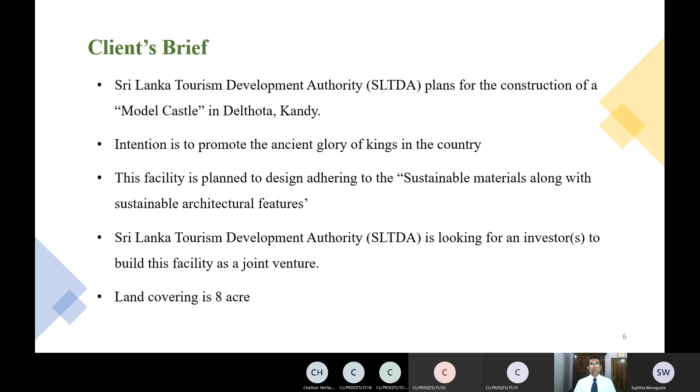Okay, when we move to the next slide, the SLTDA has given a couple of locations for us, and we selected this location from their list. Our main concern is the natural pond, because we're going to use it to develop the moat around the castle, and there's an existing building there too.

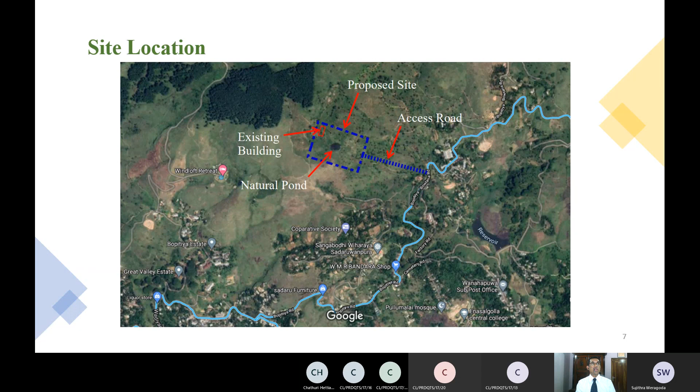Then in the next slide, we can see the geology and weather. The proposed location is about 32 kilometers away from Kandy city, and driving from Kandy takes about 45 minutes to 1 hour. The proposed area is situated in the wet zone of the country, and therefore it receives lots of rainfall throughout the year, and the 2 monsoons also bring rain to this area.

The proposed area is in the middle of the hill country, at an altitude of 816 meters above sea level. Everyone knows when the altitude goes up, the temperature comes down. So the average temperature is around 25 degrees Celsius, and because of that, the weather is more pleasant, because this area is very close to Nuwara Eliya. Everyone knows the Nuwara Eliya climate is very good.

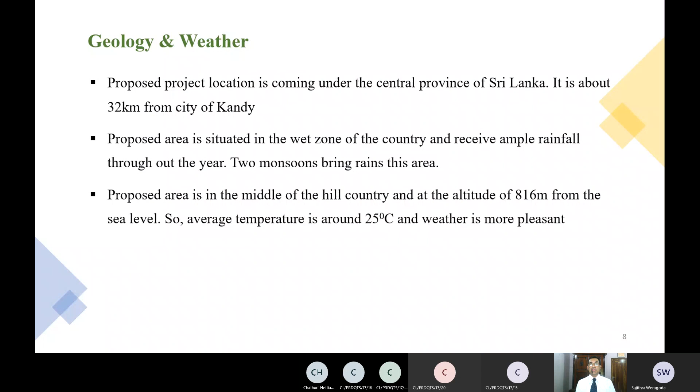So on the next slide, this is our environment: access and surroundings. The proposed land is in the middle of the mountains, so this area is a very peaceful and calm environment, because there are not many houses around there. We have an access road, about a B grade access road.

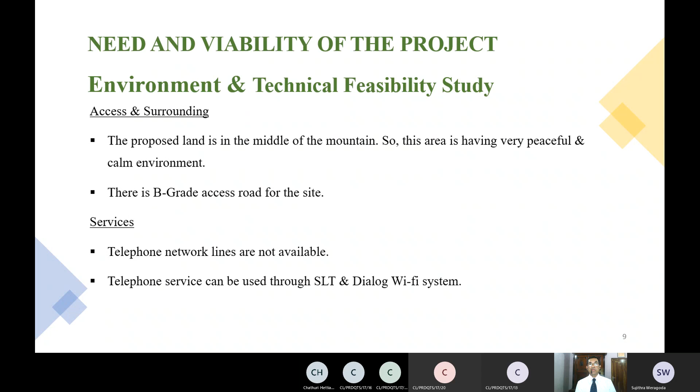Considering services, there is no telephone network, water supply, or sewerage network, because it's not very urbanized, and we think with our development the government will arrange these in the future. At the moment we have a Wi-Fi system for telephone facilities, and we could see two providers, SLT and Dialog.

On the next slide, we can see the water supply. The option is a tube well, because around this area we could find some tube wells. For the sewerage system, we proposed a sewage treatment plant and a grey water treatment plant. The grey water treatment plant will use wastewater from the washing machines and the shower area. This treated water we're going to reuse for toilet flushing.

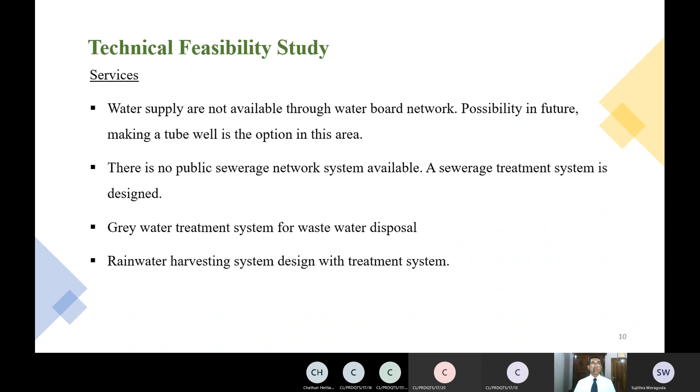And the other thing is, because of the heavy rainfall, we introduced a rainwater harvesting system, with a treatment system like a reverse osmosis treatment system, because that one gives water up to drinking water level. So when you go to the next slide, this is the financial feasibility study. Our QS will go into more detail on this one.

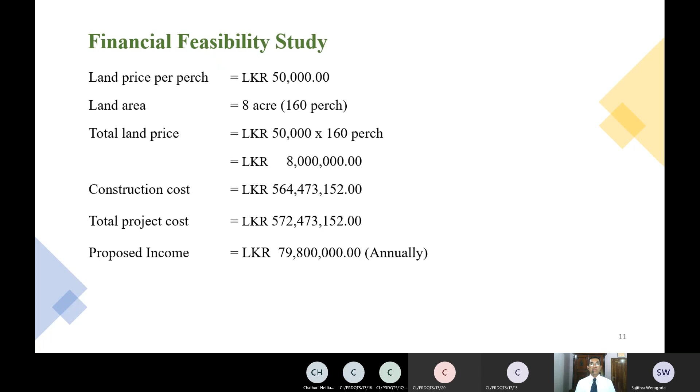When you go to the next slide, we did the SWOT analysis for this project to find out the strengths and weaknesses as well as opportunities and threats. When it comes to the strengths, CKG Consultant is a leading company in Sri Lanka for project management and building consulting, and we have good experience in project management of hotels, apartments, leisure parks, office buildings and house projects. Our professionals also have very good international experience because they have worked in Dubai and Middle East countries. So they have 6 years experience.

When you think about the weaknesses, this project is not an ordinary building. Actually, this is a unique structure, so most of the members of the team do not have such experience. The design is a combination of ancient architecture and modern technologies. There's no such development in Sri Lanka to follow for our methods and systems.

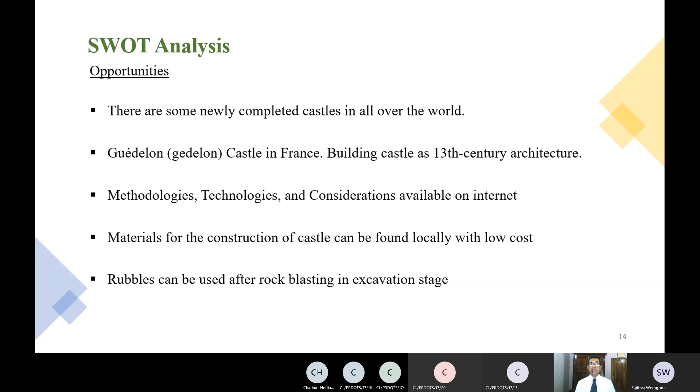When we see the opportunities, there are some newly completed castles all over the world. Recently we found Guédelon castle in France, and their methods, technologies, and considerations are on the internet, so we could go through that one. And when you consider the site area, we found the materials for the construction of the castle can be found locally at low cost, like bricks, sands, and also rubble we can get after rock blasting in our excavation stages. So that is what we analyzed.

We consider the threats. Actually, the Kandy district is identified as a hazard area, but fortunately, as per the landslide hazard zoning map of the Kandy district, our site is in the area where landslides are not likely to occur. They have marked it like this. So this is more relief for us and even the client also.

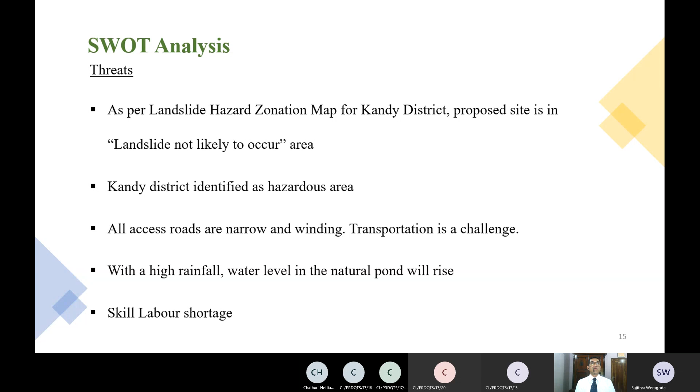All the access roads are narrow and winding, so transportation is a big challenge. And with the high rainfall, the water level of the natural pond will rise, so we have to consider that a lot also. And most commonly, skilled labor shortage; we have that same problem. So when you go to the next slide, these are the institutes we have to go to for the approvals, and we have to follow their regulations.

Then we'll go to the next slide. As I showed you earlier, we have a two-storey building located near the site. We are going to convert that building into staff accommodation in the operation stage. Before that, in the construction stage, we are going to use it as a site office and construction staff accommodation. So I think I have done my part. Hereafter, our planning engineer is continuing this presentation for you. Thank you very much.

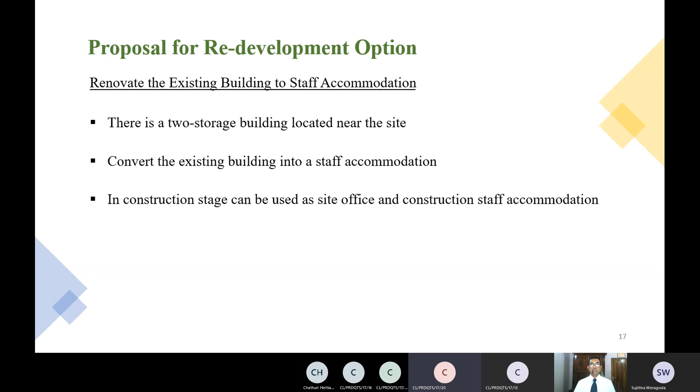Thank you, Mr. Maxwell. Carry on. Good. Thank you, Maxwell. Good morning, all of you.

I am Gayan Pereira, planning engineer of the proposed castle project for CKG Consultancies. Planning and making arrangements is a special part of the construction industry which helps to suppress unnecessary delays, issues, and unnecessary expenses. We have to get the approvals, and some clearances have to be obtained from the government before the inception of the project, as well as identifying the legal aspects on behalf of the client. By legislation in this respect, the government expects to reduce the unnecessary influence against the environment and

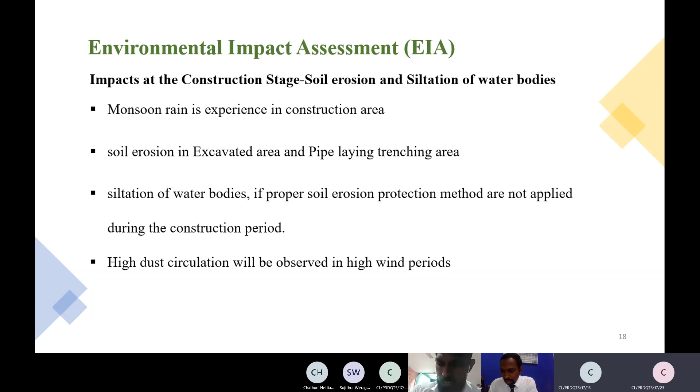Maxwell, can you see my desktop? Yeah, video is okay. No, the slide is not moving. Yeah, now it's okay, carry on.

Okay, good evening everyone. This is Ashan Chaturanga from CKG Consultant, acting design engineer. This is our site layout.

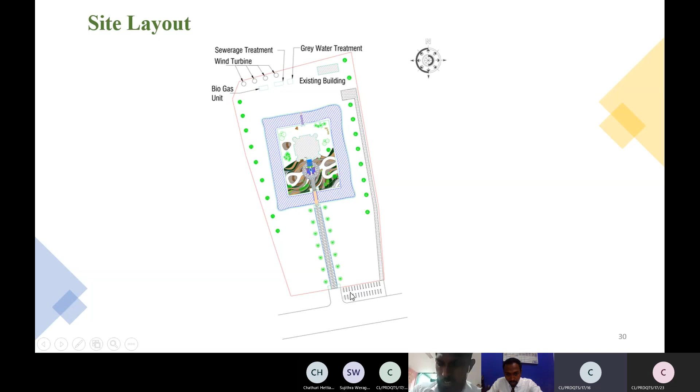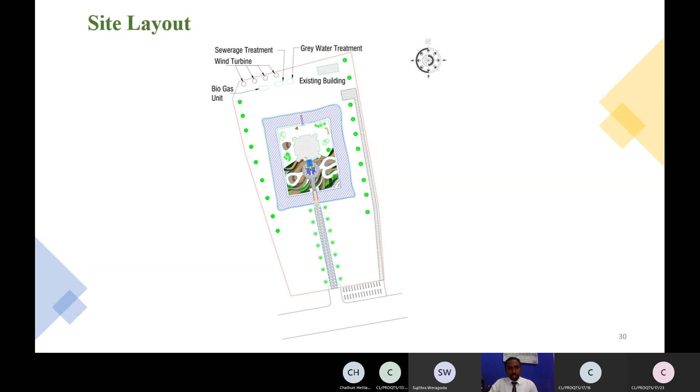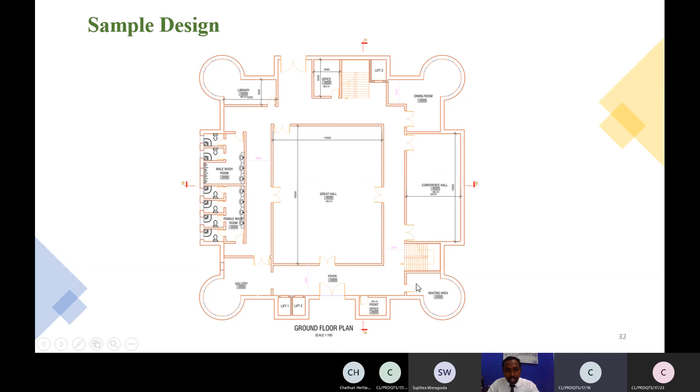This arrangement, the middle part is the great hall, and the other side is the conference hall, and this is the washroom area, and library, dining area, office, and front office, waiting area, gallery in there.

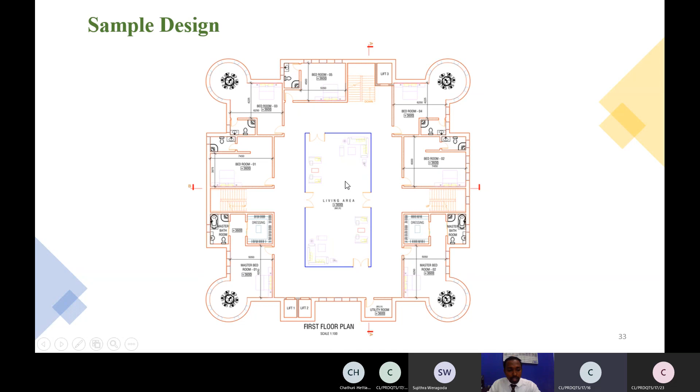The first floor plan we mainly reserved for guests. These two main areas we reserved for master bedroom, and other areas are normal bedrooms, and the middle part we mainly use for living area.

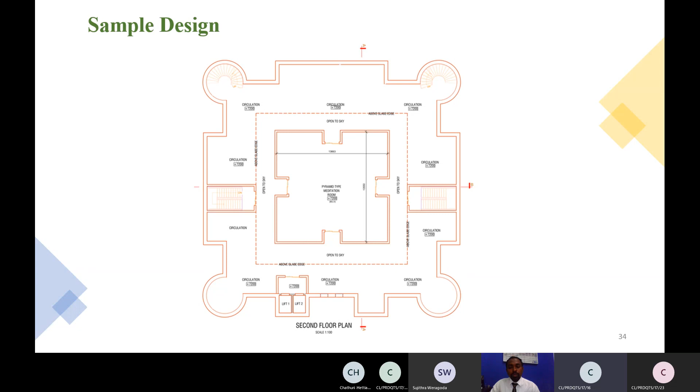Next, the second floor plan is actually reserved for, in the middle part, meditation purposes. This will be constructed with a pyramid structure, and roof terrace. The roof terrace, actually the middle part is void.

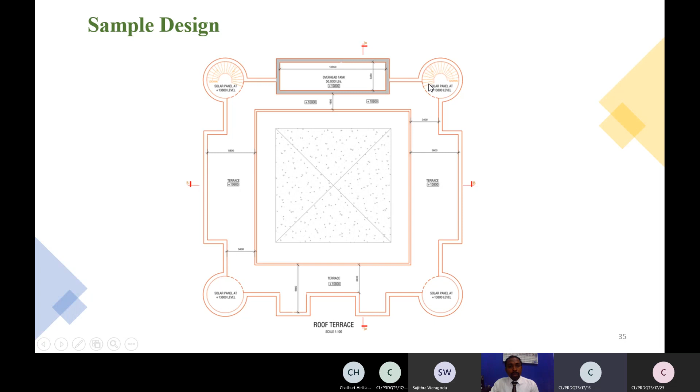Around the part we have a terrace floor, and the terrace is used for guests for walking and seeing the surrounding environment. This is an overhead tank, 50,000 liters capacity. So on these 4 towers, above level, we are planning to place solar panels.

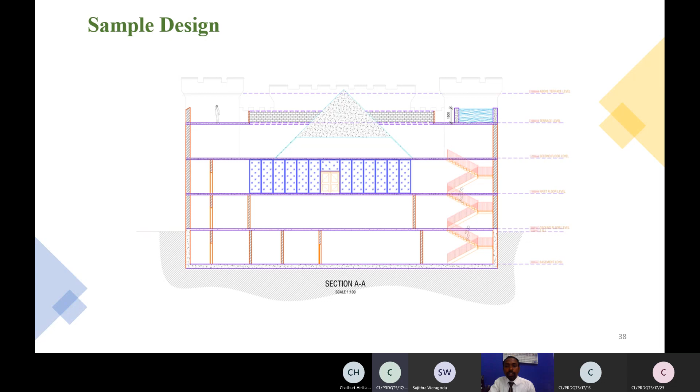I mainly highlight the bearing capacity for the raft. It's 150 kilonewtons per square meter, and settlement is 50 millimeters.

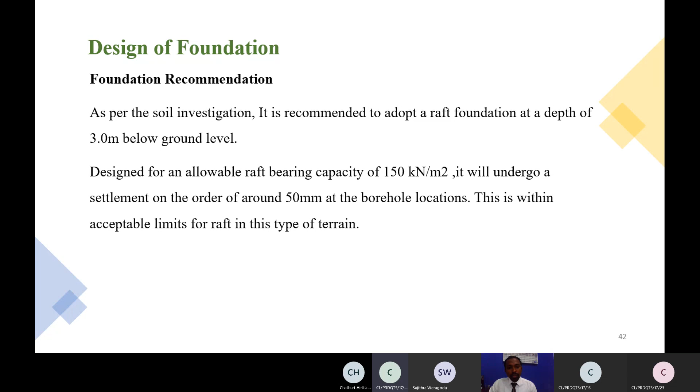I have done some structural modeling and analysis. This is the base pressure in there. So we achieved our bearing capacity, and this is my structural model.

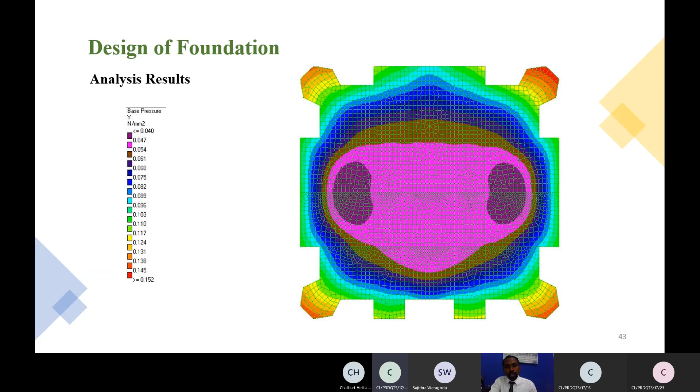Thank you for giving me the chance, and take the next chance for our quantity survey. Thank you. Okay.

Yeah, thanks Ashan. Good morning.

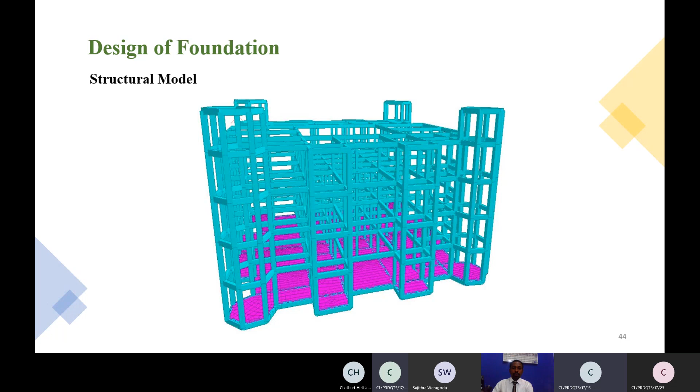I'm Kalayan Isanka, quantity surveyor of this project. Estimate and construction program is one of the most important parts in project management because it will give proper identification to the client.

It will give proper identification to the client about project cost and duration. First, we can focus on the cost estimate.

This estimate is prepared based on SLS 573, and all construction works are categorized into main sections. We can see in this grand summary the main construction sections, cost of each section, and its percentage out of the total sum. If we go through the grand summary quickly, preliminaries have been taken around 30 million.

This section includes site facilities, insurance covers, dilapidation reports, security and safety measures, site cleaning, temporary works, and all other preliminary works. It has been taken as 6.38% of the total sum.

Excavation has been taken at 10.5 million, and this includes excavation of raft foundation and rock blasting. Concrete works have been taken at 152 million. Masonry works have been taken at 6.8 million.

Waterproofing works have been taken at 5.6 million, and this includes waterproofing works in raft foundation, washrooms, and roof terrace. Carpentry works have been taken at 16 million, and this includes all doors and windows.

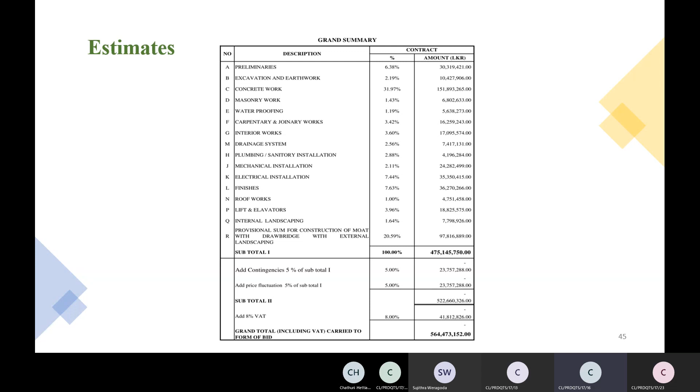So the health and safety now. Yeah, okay, I will take it quick.

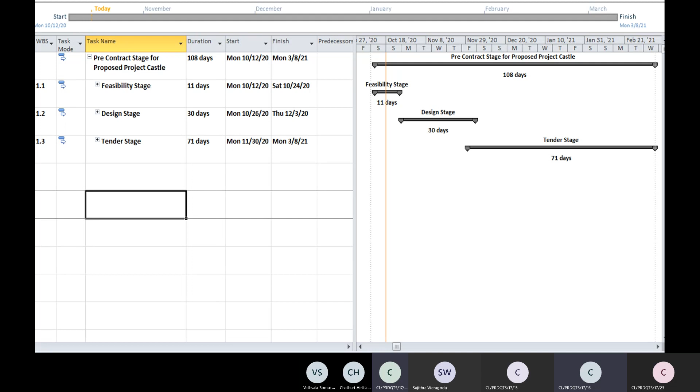Duration of the pre-contract works is 108 calendar days according to the estimated pre-contract program. This is the breakdown of pre-contract works, and these works are mainly divided into 3 stages: feasibility stage, design stage, and tender stage. The feasibility stage was 11 days, and today is the day of client approval, 24th of October 2020, and hereafter we go to the design stage of 30 days and tender stage of 71 days with approval.

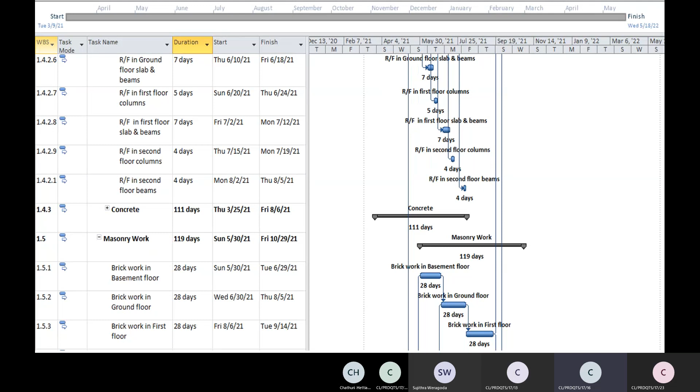The post-contract program will be scheduled to 332 calendar days. Construction works will be scheduled to start on 9th of March 2021.

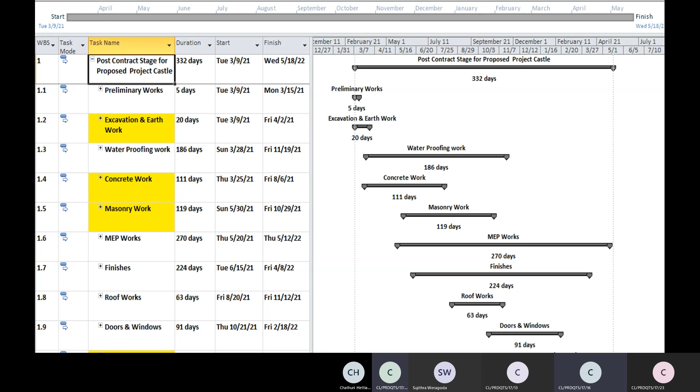Risk management, health and safety, and waste management are the major parts of construction. In the risk management process, there are 4 categories: risk identification, risk assessment, risk mitigation, and risk control.

Firstly, risk identification of this project. We can discuss financial and economic risk, social, political and legal risk, health and safety risk, design and specification risk, and scope of the project risk.

Financial and economic risks come from increased taxes and rising raw material prices. Social, political and legal risks come from changes in government rules and regulations, and incomplete approvals before starting the project. Health and safety and environmental risks involve damage to the environment due to construction pollution and negligence. Design and specification risks involve changes to the design plans, the scope of the budget, complexity, and changes in scope.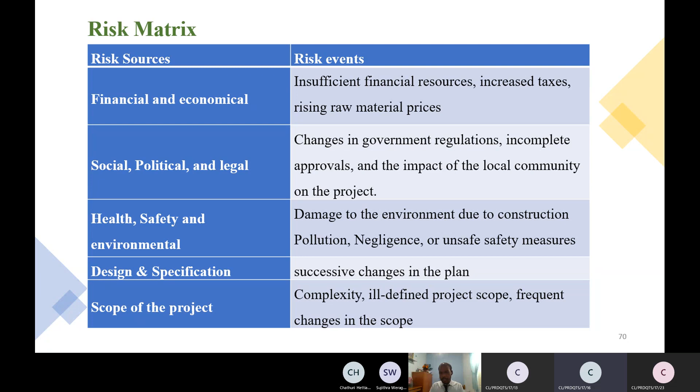We can move to the next slide. Risk assessment, risk controlling, and risk managing. Risk mitigation has 4 categories: risk transfer, risk reduction, risk sharing, and risk acceptance.

Risk transfer means transferring the risk to another party who can manage it. Risk reduction means reducing the risk. Risk sharing means sharing the risk among 2 or more parties. Risk acceptance means when no more mitigation is available, the risk should be accepted. Risk controlling means controlling the risk.

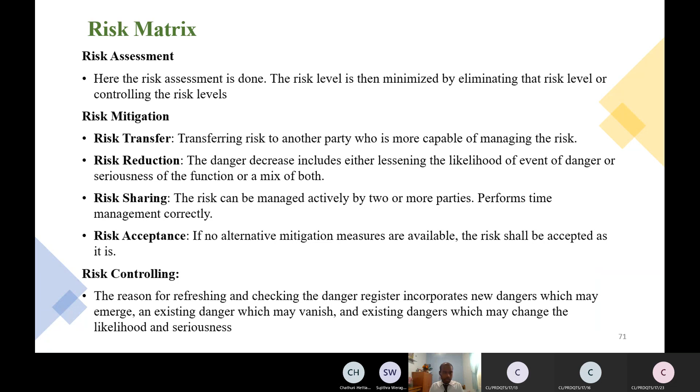We can move to the next slide. Health and safety is a major part of construction. Our health and safety policy aims to achieve the highest standard in the field of construction.

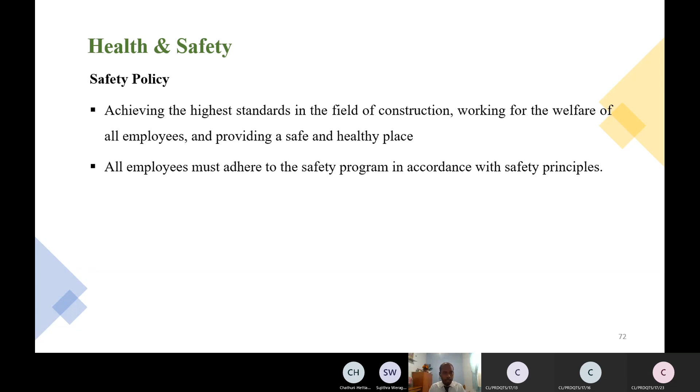It covers the welfare of employees, and employees must adopt health and safety principles. We can move to the next slide. Our health and safety principles follow.

All employees must receive advanced training, protective equipment should be used, and warning and sign boards should be fixed. Training must be provided before using machinery, and experienced people should be used for this. We can move to the next slide.

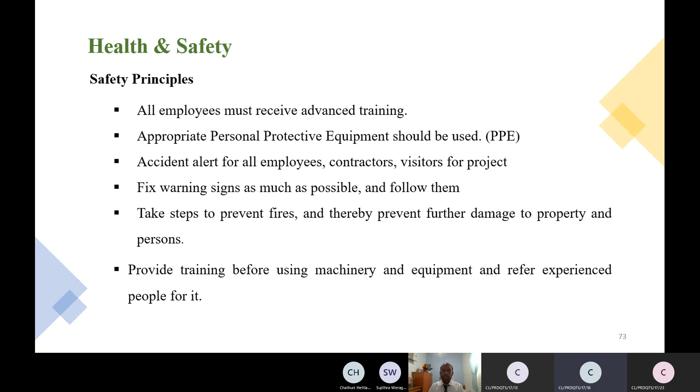Our health and safety standards are OHSAS, EMP and ISO. Then we can move to the next slide.